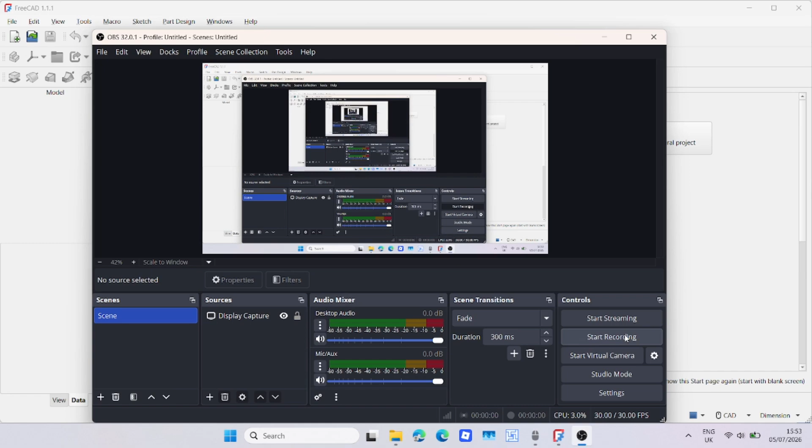Hi guys, today I'm going to show you how to make a planetary gear in FreeCAD. First, click empty file, click tools, then add-on manager.

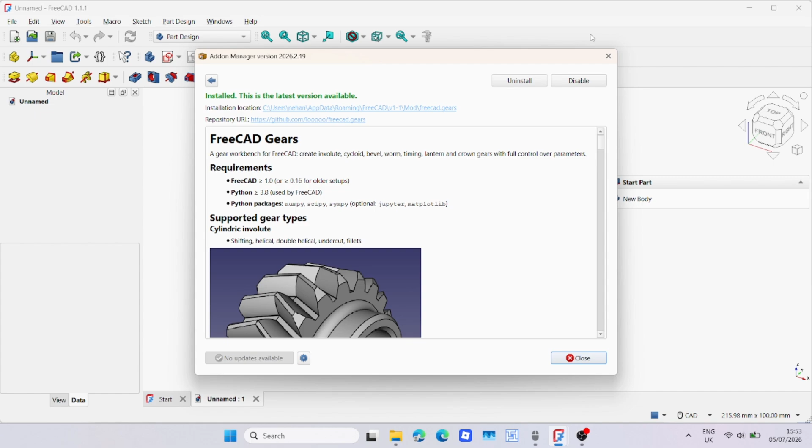Just search up gear. This is what we'll be using for the gear workbench, the planetary gear. So click install, then go to gear once you have the gear workbench. Now apart from this, the next part is very easy.

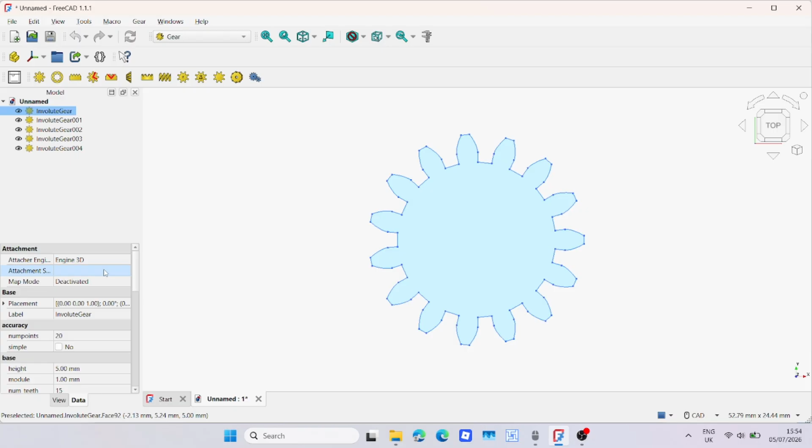It only requires 5 gears: 1, 2, 3, 4, 5. Now that we have 5 gears, click top view. We're firstly going to get the 4th gear. These were all the same dimension, so this is fine.

Get involute gear 001 and put that 15 millimeters above. Then involute gear number 2, set it to 7.5, 12.99.

Oh wait, yes. This one here is supposed to be minus 15, not 15.

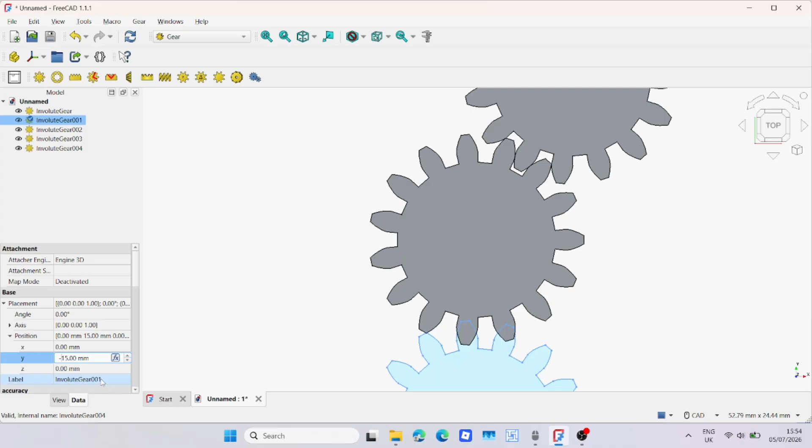And then we could just reverse one of these calculations for the third one. So let's do minus 7.5. Oh no, 12.99 minus 7.5.

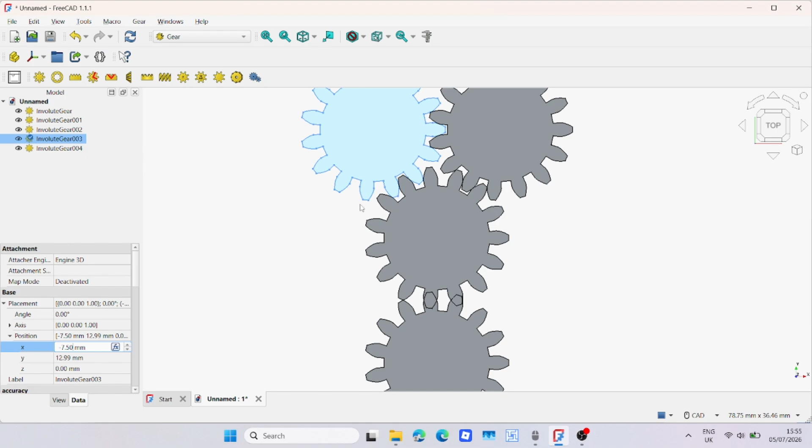Wait, let's just check this model real quick. So we got this one here. These two are too close. No, okay, now I remember.

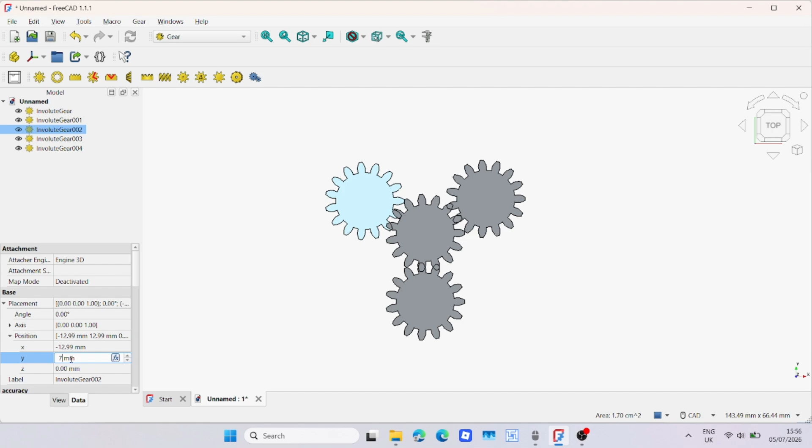This is supposed to be 12.99. This is supposed to be minus 7.5. This is supposed to be minus 12.99. This is supposed to be 7.5. And these three are now done.

What we're going to do is rotate this on an angle of 12.

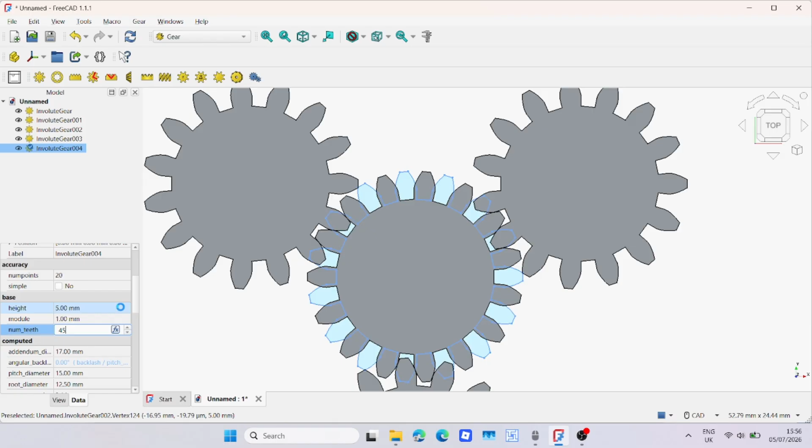Now what we're going to do with the last gear that has not been modified since the start is go down to number of teeth. The pitch diameter is 15 millimeters. Let's just change that to 45 for the number of teeth. Now the pitch diameter is 45 millimeters.

Then again, we're going to rotate this on an angle of 12.

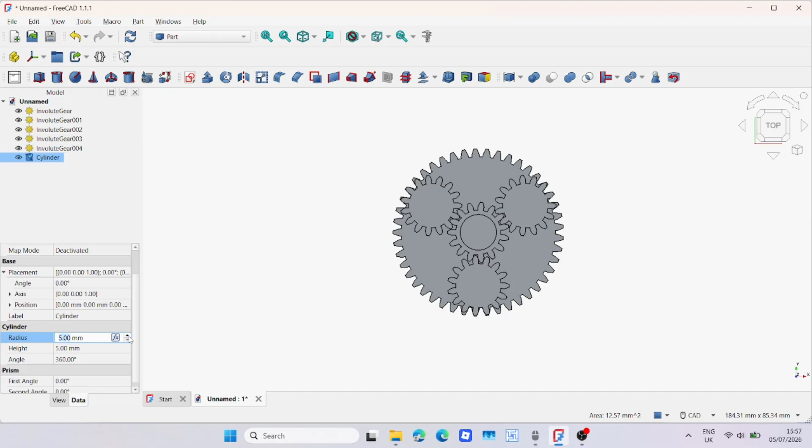We're going to click part, then click this cylinder. I'm going to adjust the height to 5 millimeters. We can zoom out on this one, anything bigger than the gear.

Then we're going to select the gear, hold shift, select the bigger 45 teeth gear, click cut right next to Boolean operation. And here is your planetary gearbox.

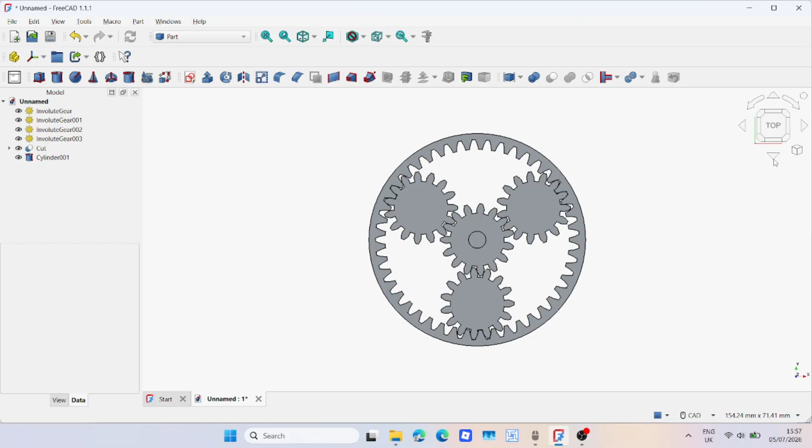What I'm going to do now is add another cylinder so that when we 3D print it, we can actually twist the middle knob. So I'm going to put this at a height of 18.

You can also add some of your own limiters and extra add-ons to keep the gear in place, but I'm mainly just doing this for fun, not for any project. But what you could potentially use this for is probably to slow down a motor, or ratio limiters—not ratio limiters, where the gears, when they rotate, can get slowed down over time.